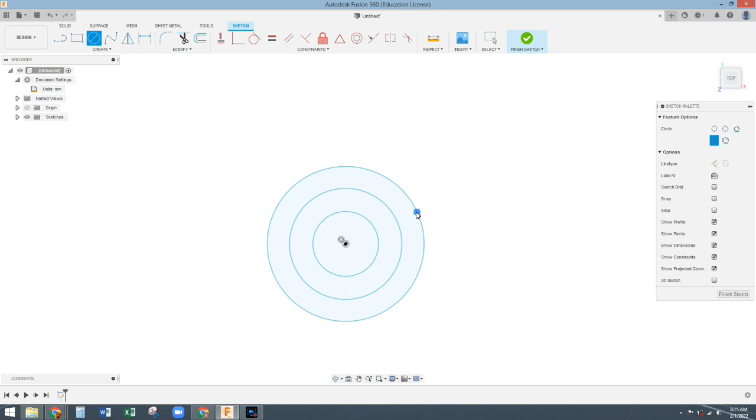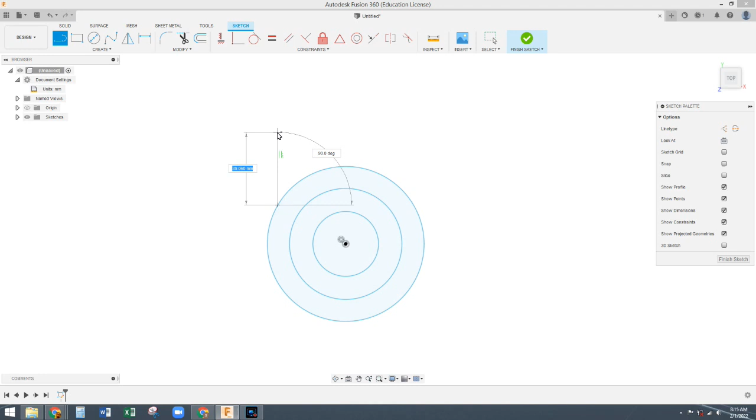I'm not really worried about the size right now because I'm going to use the dimension tool to pull those into size later. Circling back to my diagram, I can see that I have a rectangular back to this shape and then another rectangular boss that sticks out of the top. So I'm going to grab the line tool and I'll draw 3 lines to create the box on top of my shape and 3 more lines to create this little boss.

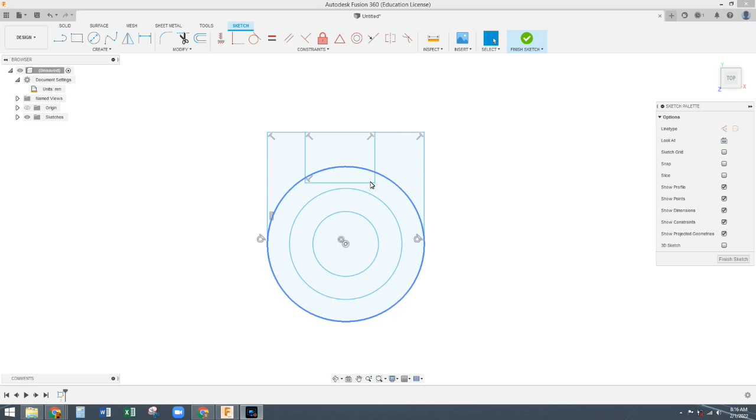Okay, now I'm going to start adding some geometric constraints. First, I'll use the tangent constraint to get my larger box lined up with the smaller one. It looks like this line needs to go down a little bit, so I'll drag it down. And then I'm going to take the trim tool and cut out some of these lines that I don't need. I'm actually going to scoot this back up a little bit so that I only trim the part that I mean to cut out. Alright, this is looking a little better, but still not perfect. So let's start applying some dimensions.

I can see that these various circles, the innermost one has a radius of 23, then the next one has a radius of 34, and finally the largest circle has a radius of 60. There's also this dotted line circle, which we'll deal with in a minute. So 23, 34, and 60. Remember, these are radiuses, not diameters. So if I grab the dimension tool, click on this inner circle, you can see that it's giving me this little circle with a slash through it symbol. That is the symbol for diameter.

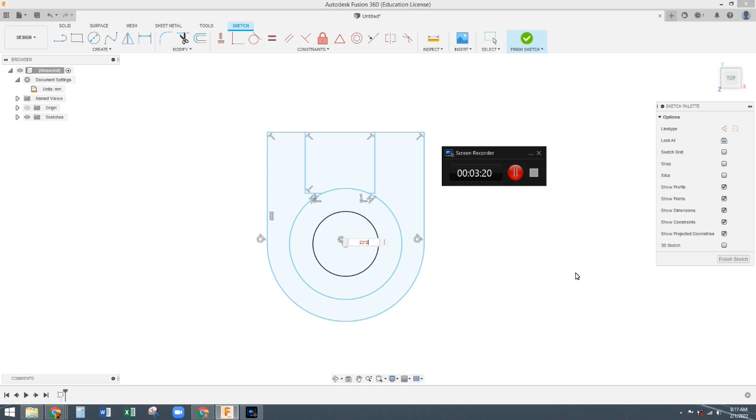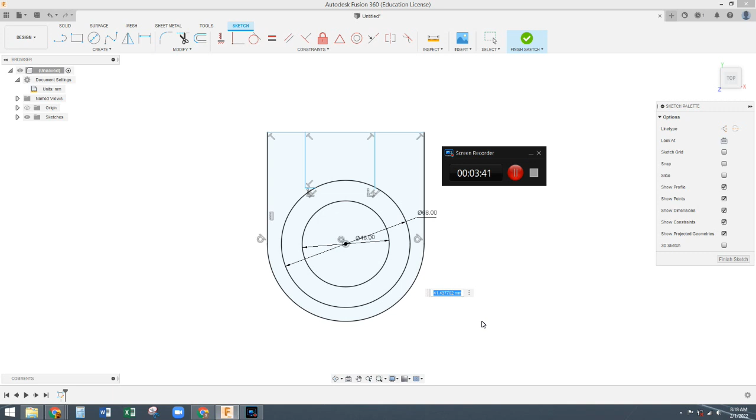So we were given the measurement for the radius. We need to convert it to the diameter, and to do that, we can just multiply it by 2. So I'm going to double click on this dimension, edit it, and type in 23 times 2 and enter. Fusion will do that calculation for me. Now I'm forgetting what I said, 34 and 60. So same thing again. This is asking for a diameter, so I'll just type 34 times 2. And finally, here we can see I've got an R, so that means it wants a radius, which is good. I can just type in 60.

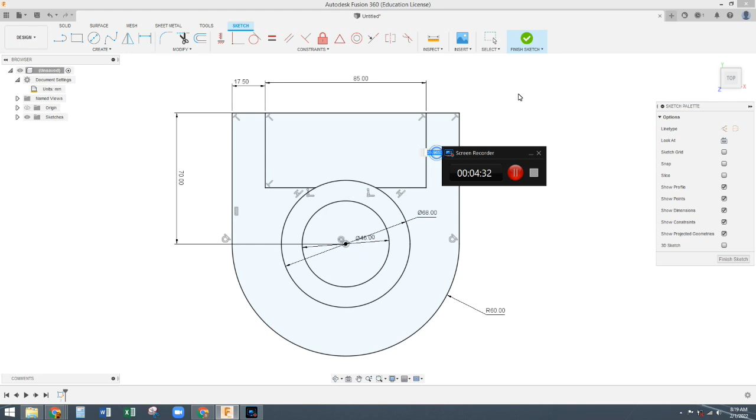Alright, next I want to apply some dimensions to my rectangles up top here. So I can see that it's 70 millimeters from the center point of the circle back to the back side of the object. And then this little top piece is 85 by 40 millimeters and is 17.5 millimeters from the corner. So let's add this 70 millimeter dimension first between the center point and the back line. I can set this point as being 17.5 millimeters over from the edge, these 2 points as being 85 millimeters apart, and this vertical distance as being 40. Okay, now this looks a whole lot more like the drawing, which is good.

The last thing we need to do before we start extruding is add these little holes. So we can see that the diameter of this hole is 10 millimeters, and I don't actually have indications on the diameters of these holes, but generally when we see this sort of pattern of holes, which is called a hole pattern, what that means is we're going to have a single object that's going to bolt on here with multiple bolts. And when that's the case in an engineering design, those bolts are generally all going to be the same so that the compressive force that they apply is evenly distributed around our part. So I've received this one dimension for 10 millimeters.

A 10 millimeter diameter hole, I am going to assume that that also applies to these other holes. Another quick note that I want to mention is in Fusion 360, when we're not in sketch mode, there's a tool called the hole tool. I do not want you to use that to make holes in your objects. That is for specific design applications, which are not what we are doing in this class. So don't use the hole tool.

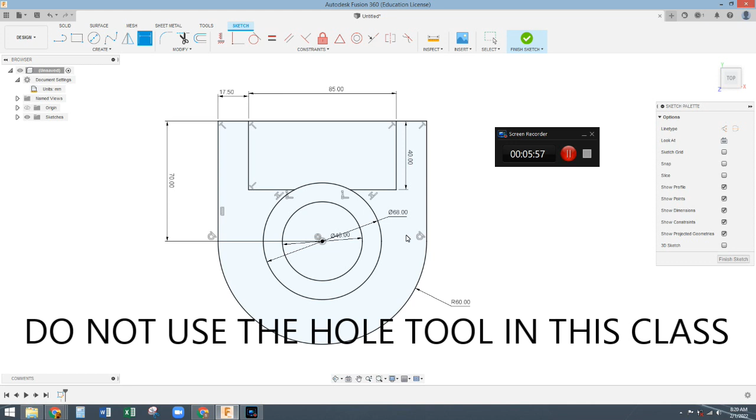If you want to punch a circular hole through something, we are just going to use the extrude tool for that. Okay, so I'm now going to add this dotted line circle and maybe these other dotted lines that we see here. I can see this dotted line. It's really only a half circle, which has a radius of 50. So in order to make dotted lines, we can go over here to the right to the sketch palette. Yours might be compressed, but you can just hit this little plus sign to make it bigger again.

And we have an option here called construction mode. We can change our line type to construction. So I'm going to go ahead and select construction and then grab my circle tool, and you can see that what I'm drawing now is actually a dotted line circle, which is pretty cool. I'm still in construction mode, and so when I grab the line tool, it will draw me a dotted line.

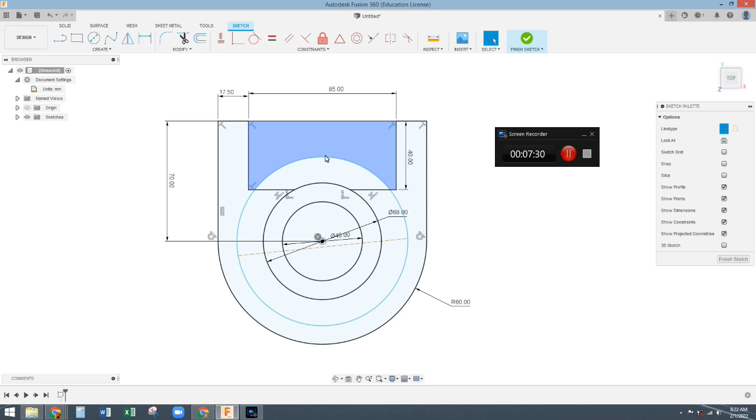This is really useful. What the dotted line does is, as we draw lines in Fusion, we're creating shapes. So you can see if I hover over this rectangle, Fusion is going to highlight this rectangle shape that I've drawn. Sometimes we want to use geometric constraints to define the shape and size of our objects, but we don't necessarily want those lines to carve up our shapes. So you can see if I select my circle and unclick construction, it's going to turn into a regular circle. Now when I hover over this rectangle, the rectangle is carved up, which is not necessarily useful to me. So I'm going to select it again, switch it back to construction.

Now I'm going to apply some constraints to this line down here. I'm going to make it horizontal, and I am going to make it coincident to the center point of this circle. Then I'll use the trim tool to trim off these pieces of the circle that I don't need. Finally, I'll use the dimension tool to set this dimension at 50. And I am then going to switch out of construction mode and use the circle tool to make a little circle, which I will dimension at a diameter of 10 millimeters.

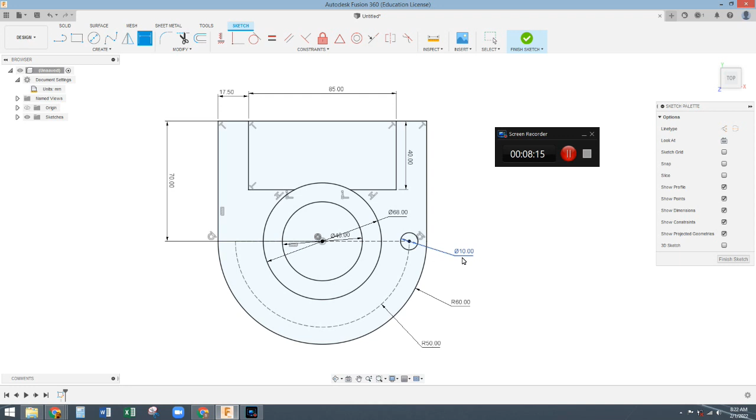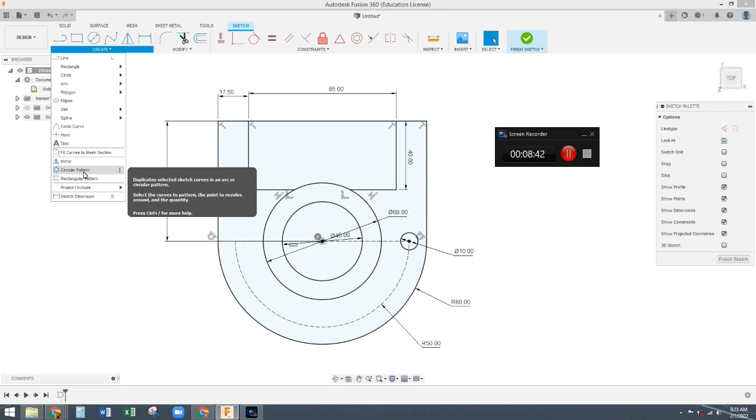Now, I could go back and draw 3 more circles here, each individually, but that sounds like too much work for me, so I'm actually going to do a different trick. If I go to the drop-down Create menu, I've got an option down here called Circular Pattern, which is a tool designed to do exactly what we need to do here. Take a feature of our sketch and spin it around. And let me show you what that means.

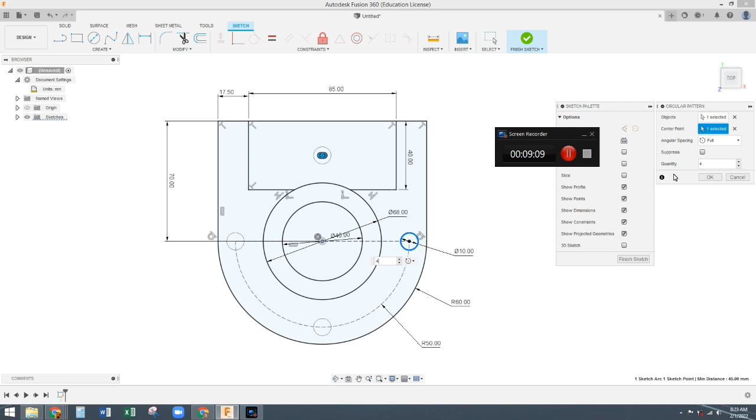So I've clicked on Circular Pattern. I've got a little Circular Pattern menu over here. It's asking me what objects I want to pattern, so I'm going to select my circle. Then it's asking what the center point should be. I'm going to select the center of my design. And you can see it's showing me what it would look like if I had a circular pattern of 3 of these objects. Of course, I actually want 4, so I'll set it to 4, and I'll click OK. Boom, just like that, my whole sketch is done. I believe I have captured all of the features of this design, which is great. So I'm going to hit Finish Sketch, and now let's do some extruding.

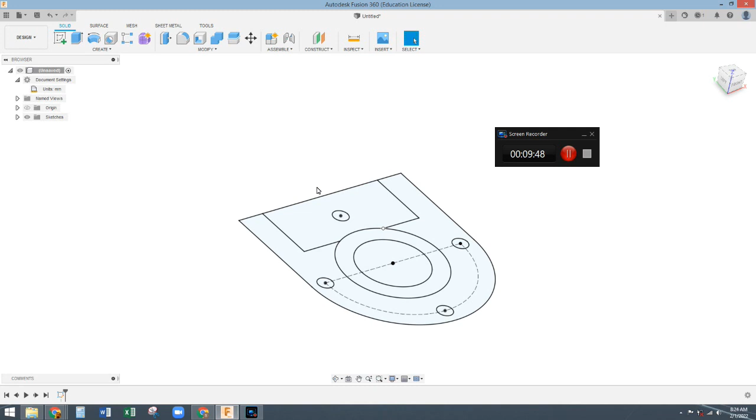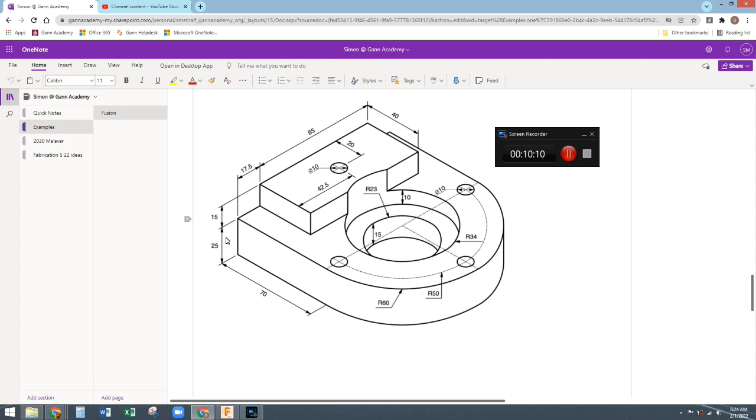Okay, so first I'm going to extrude this main flange up to a height of 25, and I'll extrude this inner area up to a height of 15. I'll take my extrude tool, select this large area, type in 25 and hit enter. My sketch has been hidden, so I'm going to open up the sketch folder and unhide it, get the extrude tool again, extrude this inner section up to 15, and then it looks like this last bit is a height of 15 above the base height of 25. So I'll take the extrude tool, type in 15 plus 25, and there we go. We have recreated the part from this drawing.